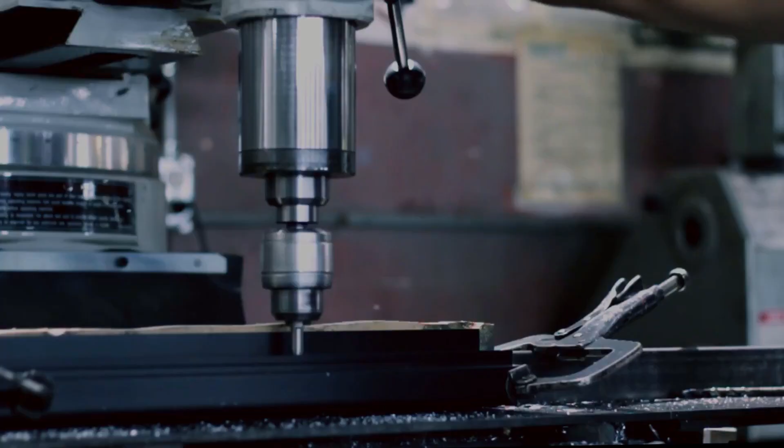However, there is also the type of noise that is neither pleasant nor useful. Traffic noise, loud machines in factories, etc. In 2018, the World Health Organization published an extensive report in which the connection between noise and health risks was established. It turns out that excessive noise can not only make us deaf, but also can impact our mental and physical health in other ways, such as a chronic lack of sleep and an increased chance of getting cardiovascular diseases.

My name is Sjoerd van Ophem and I'm a postdoctoral researcher here at the KU Leuven in Belgium. And the aim of my research is on the one hand to minimize noise when it could cause health problems, while on the other hand making sure that we can enjoy and use sound when it's beneficial to us. In particular, I'm looking at sound that is caused by structural vibrations.

Many products that we use in our daily lives produce sound that is caused by structural vibrations. Examples are your smartphone, guitar, etc. To battle the excessive noise or maximize the impact of the desired sound, we need to understand the physical behavior, which can be predicted using models. To understand how we should model sound, we should first look at what sound waves are.

We are all familiar with water waves, but sound waves are a bit more difficult to picture since they act on air particles that are too small to see. Whenever a sound is made, for example when we perform a snare drum roll, air particles start to vibrate, leading to a wave. When this wave reaches our ears, they make our eardrums vibrate. Thus, to make a computer model that correctly models sound, we need a model that captures this wave behavior.

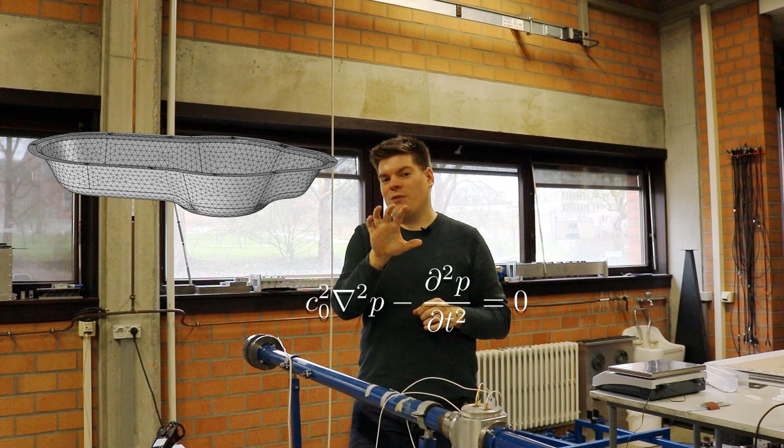So what to do? Luckily, in recent decades, computing power has increased dramatically, which means that we are now able to solve this problem by using computer models. Starting with a digital representation of the object, this object is cut into small little elements, which we call finite elements. And these finite elements are then forced to weakly adhere to the wave equation. Then we end up by combining these elements with a set of linear equations that we can easily solve in our computer, and that gives us an approximate solution to a problem.

The problem with these models is that even by today's standards, they require a huge amount of computing power. Let's say you would want to do real-time sound prediction on your smartphone. This is not feasible. In my PhD thesis, I focused on a solution to this problem that works with the concept of model order reduction. To show you what I mean by that, let's go back to another example. In this example, I show a simple model of a rectangular room. Again, the model is chopped into small elements and the solution is calculated.

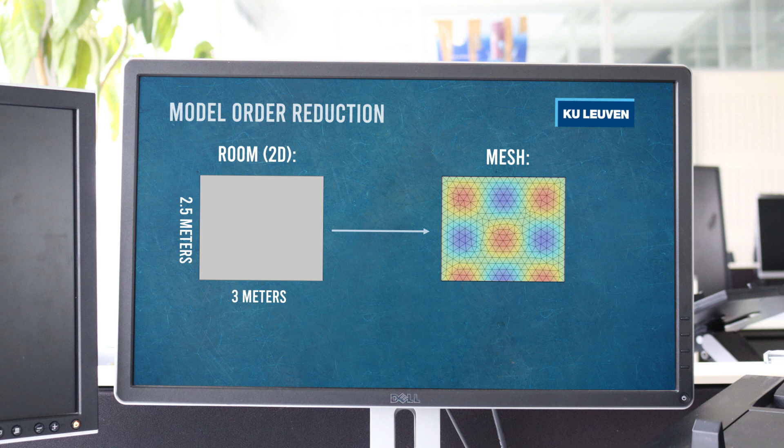A naive model order reduction approach would be to increase the size of the elements. This would definitely lead to a smaller computer model. The thing is that the model still allows for solutions at higher frequencies, such as the following non-physical solution. The philosophy of model order reduction is to throw all of this unneeded information out of the equation.

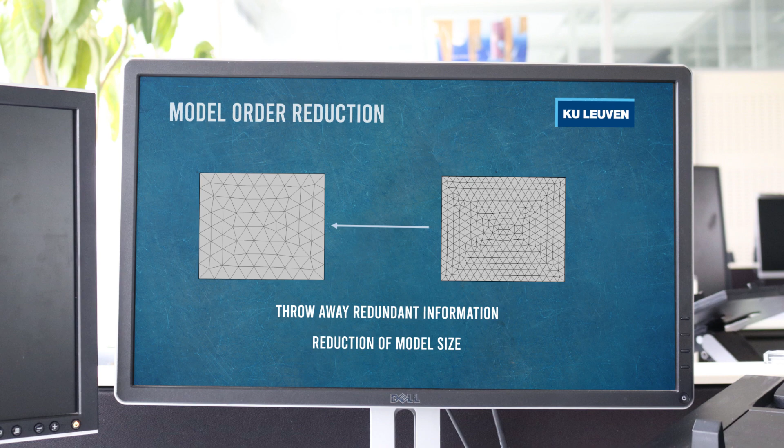In particular, my research interest is focused on the modeling of exterior vibro-acoustic problems. That is, problems that are unbounded in a certain direction. An example would be the noise coming from a rock concert happening around the corner of your house.

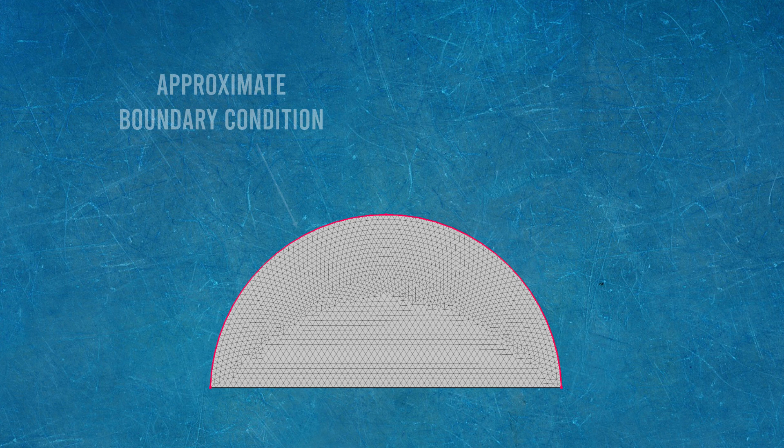The tricky part about the resulting models is that we cannot chop our problem into an infinite number of elements in the unbounded direction. Instead, a known solution is to limit the number of elements to a certain distance and then apply a boundary condition on the edge that approximates the unbounded domain. This extra boundary condition leads to additional challenges from a model order reduction point of view, such as stability in the time domain.

In my thesis, I derived a method to apply model order reduction on this problem that retains time stability. The model uses infinite elements on the boundary of the finite element mesh. As the name suggests, these elements extend to infinity to approximate the unbounded domain.

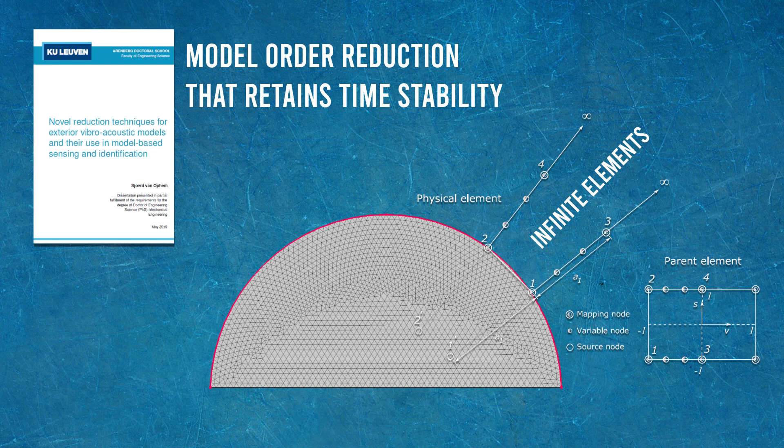The proposed strategy leads to models that are super small. To give you an idea, from models with tens of thousands of variables to less than 100 variables, while retaining the desired accuracy. By itself, this is already a very useful result, since it gives scientists and engineers a tool for the rapid calculation of complex vibro-acoustic models. An example could be the detailed modeling of a speaker cabinet for designing the best possible sounding speaker.

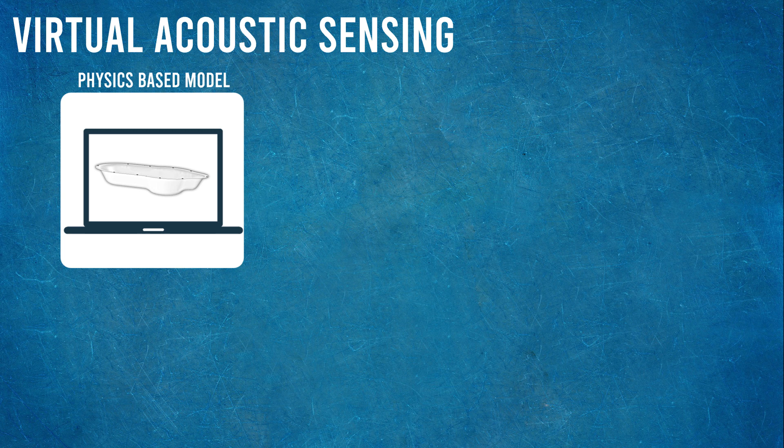Besides pure modeling, another interesting approach is to smartly combine the numerical model with a small set of real-life measurements and get the best of both worlds. The small set of measurements gives us information on the real physical system, while the numerical model gives us the opportunity to also calculate the vibro-acoustic behavior on points where we don't measure. Thus we are effectively creating a virtual sensor.

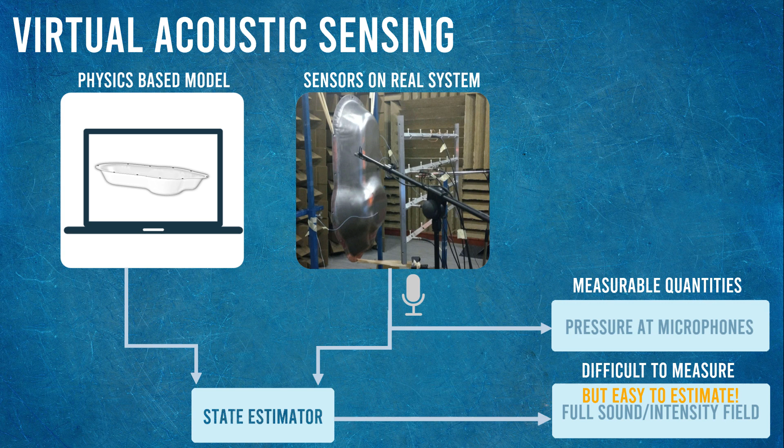For example, we could use this concept to create a virtual microphone on a location where it is practically impossible to put a real microphone. The creation of a virtual sensor is possible through a process called state estimation. An essential part of this virtual sensing scheme is to have a numerical model that is compact and can be evaluated in near real time. Thus, here is where the reduced order models that I derived come into play.

During my PhD I took this structure, which is a deep-drawn structure that represents an oil pan, to see what is the sound radiation from the structure. Now let's put it in a room that we can accurately model with our exterior vibroacoustic models.

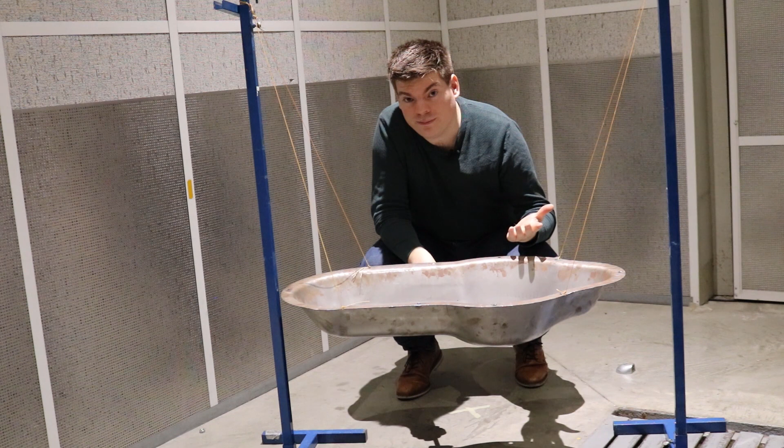We are now in a semi-anechoic room, and as you can hear, it's very silent here. In fact, the only reflections in this room come from the floor. All the walls are made to absorb sound. Thus we can perfectly model this with our exterior vibroacoustic model to, for example, determine the sound that's radiating from the structure if I hit it with a hammer.

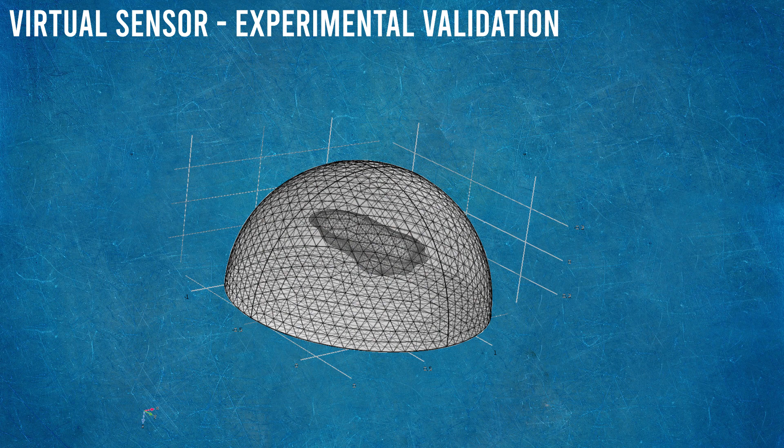Due to the deep drawing process, the structure is very difficult to model accurately. We compared a few time domain microphone measurements with time domain data coming out of the numerical model, and the results were off. However, after this step we built the virtual sensor. We used a finite element model combined with infinite elements and reduced it in size.

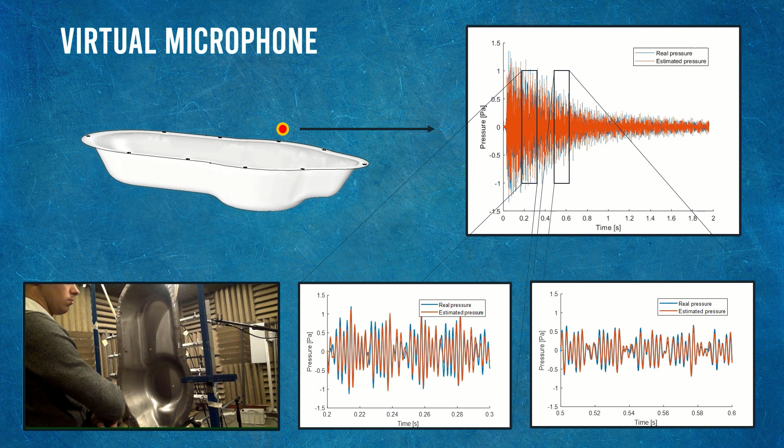We took a small set of microphone measurements, in this case 5 locations, and we measured the input force. Then we checked the virtual pressure measurement against the real one, which leads to the following results. Thus a very good match is obtained between the virtual and real sensor, much better than before.

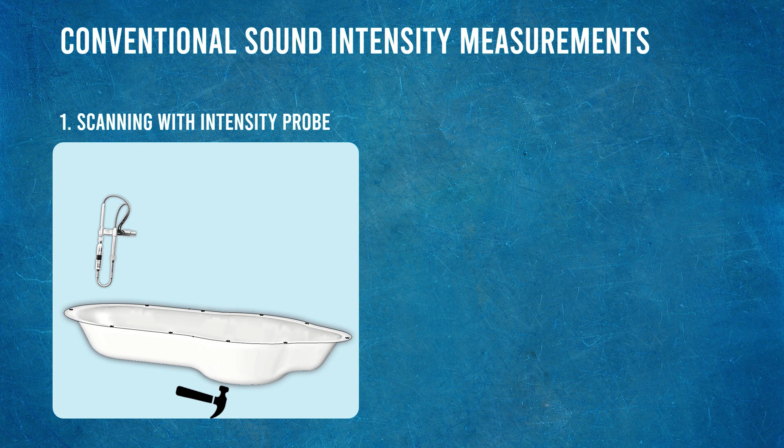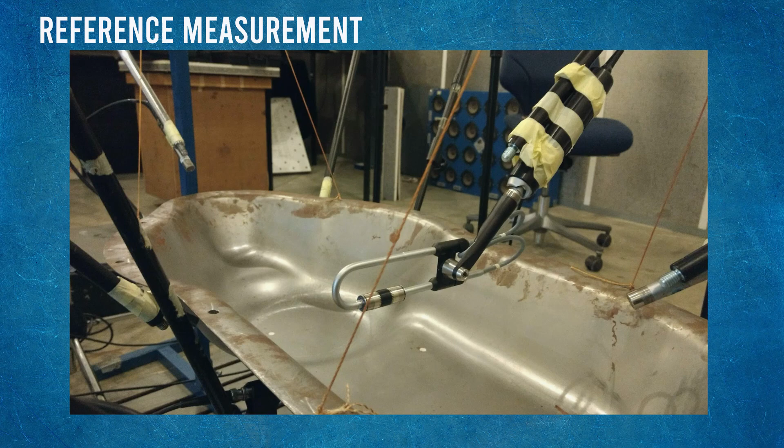Next we looked at the possibility of measuring the sound intensity with a virtual sensor. Conventional sound intensity measurements either require a tedious scanning procedure with an intensity probe or a large amount of individual measurements. Comparison is made with a reference measurement that is done with a sound intensity probe, and the results show a good agreement between the measured sound intensity and the sound intensity from the virtual sensor.

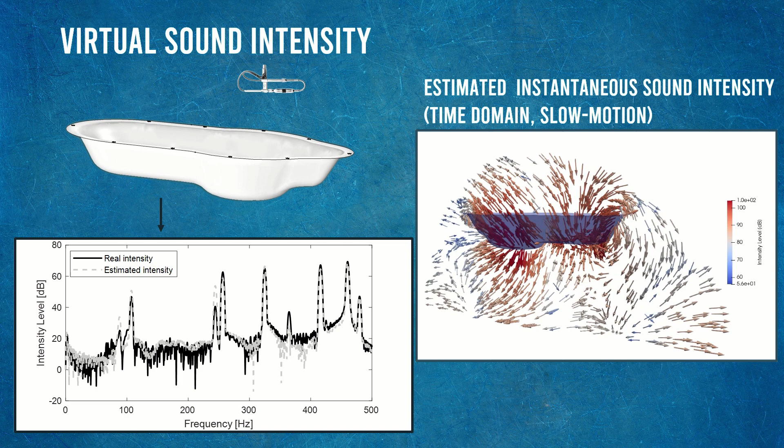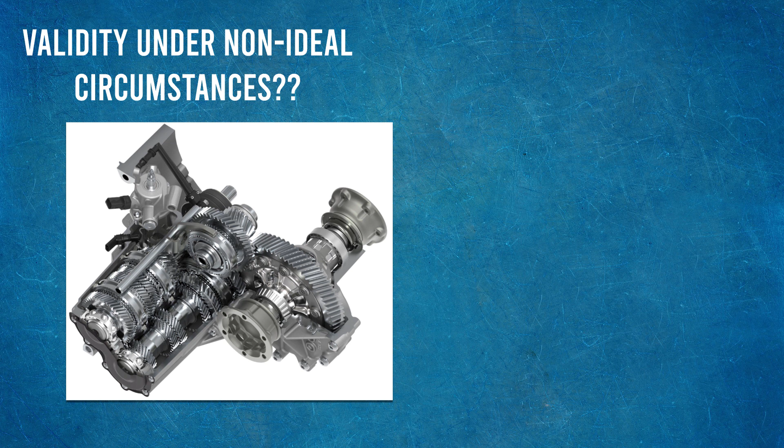Furthermore, we can calculate the sound intensity in the full field as a function of time, which we can use to calculate the radiated sound power. A question that we had while performing this experiment is its validity under non-ideal circumstances. When, for example, a virtual sensor has to be constructed for a vibrating machine in a big assembly hall, could this approach still be used although the acoustic conditions are not semi-anechoic? If so, this would be greatly enhancing the possible use cases.

In this video, I've given you a glimpse of what I did during my PhD. I started by deriving time-stable, effective, reduced-order models for exterior vibroacoustic problems that consist of a combination of finite and infinite elements. These schemes are very useful in the design phase for vibroacoustic products and machines.

Furthermore, I've shown how to create a virtual sensor that is able to estimate the sound intensity of a complex vibrating object using these reduced-order models, which gives promising results.